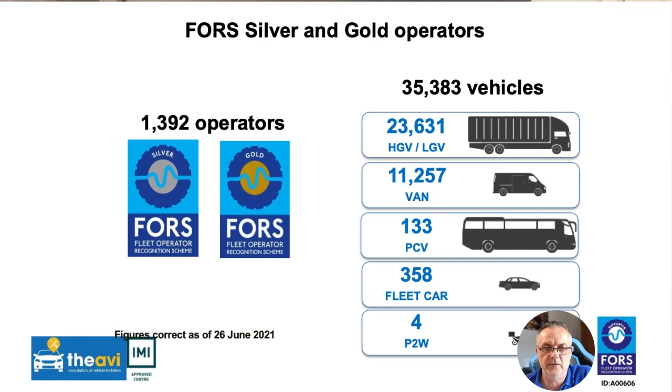And then we move on to DVS. Well, DVS has been launched by the Mayor of London now. It's actually live now, and it's for HGVs. Basically, it's an offence now for any vehicle over 12 tonnes to enter London without a permit. The legislation is based on a star rating, and each vehicle is given a star rating, and the indication is basically how much the driver can naturally see from the cab directly.

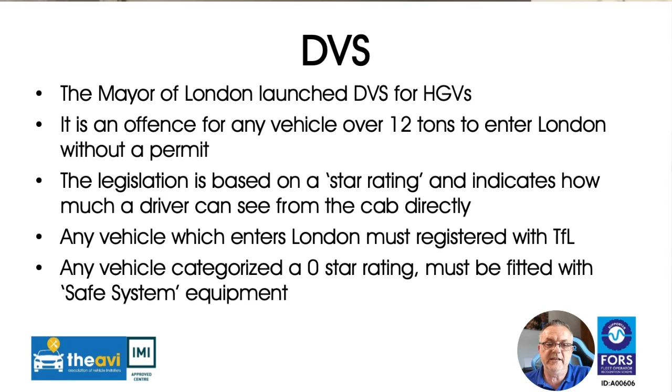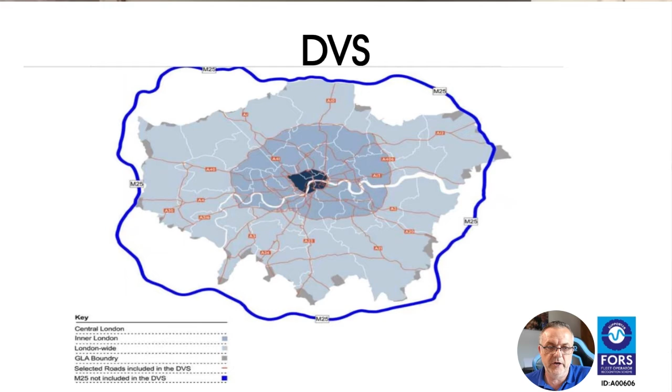Any vehicle which enters London now must be registered with Transport for London, with TfL, and you're given the classification when you register. Anything that's categorised as a 0-star rating now must be fitted with safe system equipment. To give you an idea about the type of area it covers, it's inside the M25 - not actually on the M25, but inside the M25 in what they call, I believe, the London-wide area.

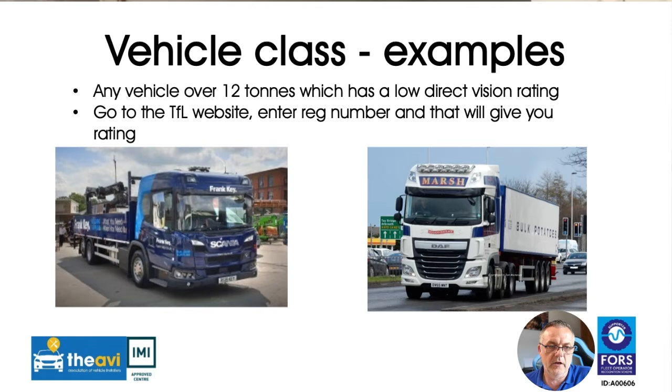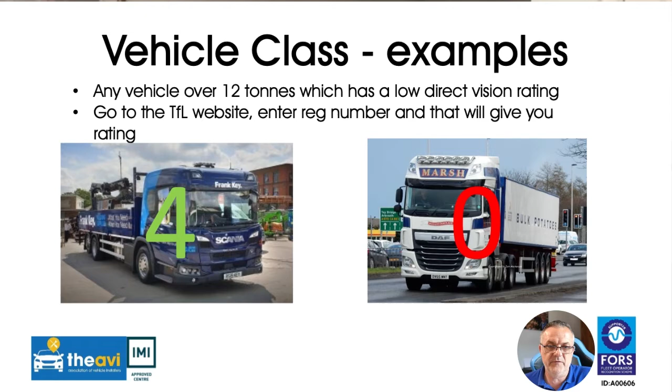And to give you an idea about the vehicle classes, you can see there's a low-entry cab there, and then we've got a high cab there. Basically the lower cab is a class 4, and the quite high cab there you can see is a class 0. So that class 0 vehicle would need a safe system fitted.

So we look at the FORS requirements and DVS safety systems. We'll quickly go over the bronze, and then we can go over the silver afterwards. So bronze is pretty much standard kit on coach-built vehicles, and normally they're fitted by the manufacturer as well - we're talking about class 5.

You can see on that slide there, the class 5 and class 6 close proximity mirrors, and then also under the bronze you've also got a side underbar, so that's your side underrun protection, and then you've also got the blind spot warning signage there just at the rear. Okay, so that's your bronze.

And then for silver, you have to have side sensors fitted - your close proximity sensors and a blind spot camera - and then also you need the audible warning system when the vehicle's turning left. And if it's a rigid vehicle, you need to have a rear view camera for when it's reversing, and also an audible warning system for when the vehicle's reversing as well.

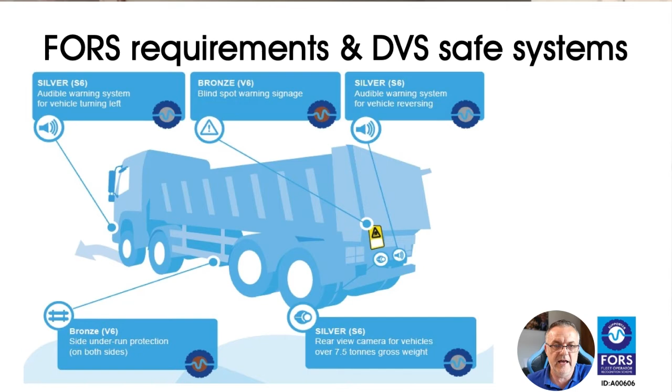So in terms of signage, we'll go right back to the bronze and talk about signage. The signage that you're allowed to put on there, it's a requirement that you have warning only signs, and then it has to go on the rear of the vehicle. You're not allowed to put instructional signs on the back saying stay back, for instance, like you can see there, or anything that's offensive - those are not acceptable.

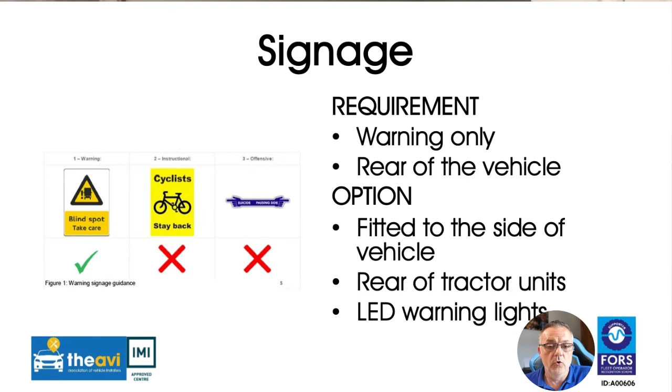And then the option is to have one fitted to the side of the vehicle - you can have one fitted to the side door or along the side of the vehicle. You can have one fitted to the rear of a tractor unit, or as an option, you could have LED warning lights as well.

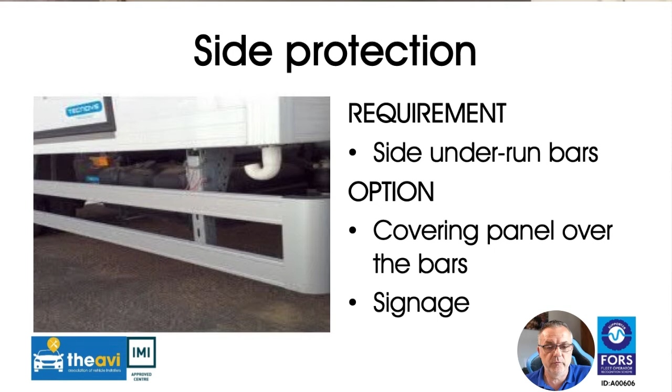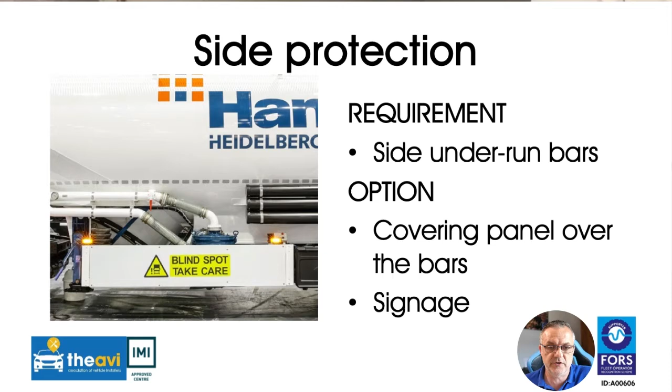In terms of side protection, the requirement is side underrun bars. However, what you could do as an option is to cover the side underrun bar with a panel. And in terms of signage, yes, you can put signage on the side of these underrun bars as well, as an option.

Class 5 and Class 6 mirrors, as we already know, most of them are installed by the vehicle manufacturer or the vehicle bodybuilder. Class 5 is the mirror at the top of the passenger door, pointing downwards. A Class 6 mirror is the one that points from the front of the windscreen and shows the front blind spot on the vehicle.

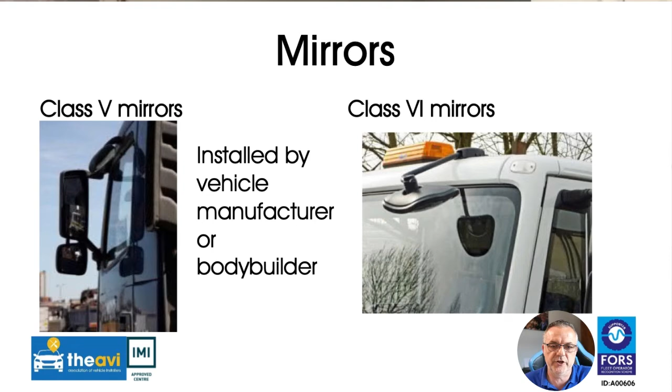So we move on to audible warnings, that it's a requirement. When I talk about requirement and recommended, the recommended is not actually needed, it's only recommended. The parts that are requirements basically have to be fitted. Recommended is an option, or they'd like it, shall we say.

So requirement is near side of the vehicle, activate on the left indicator. Recommended is a voice message to tell you that the vehicle is turning left. And also it's recommended that a cut-off switch be fitted so that the driver can switch it off between 11:30 at night and 7 AM in the morning.

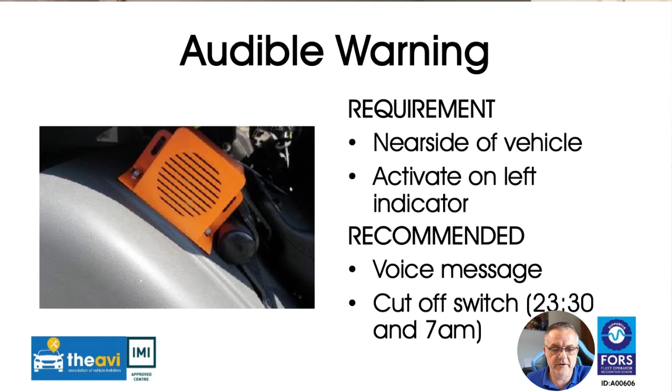For FORS only, the requirement is on the rear of the vehicle and it activates on reverse. So the audible warning is only on the rear of the vehicle, and it activates on reverse. It's recommended that it's a buzzer, bleeper, or voice message. And again, a cut-off switch, or you could use the same switch to cut it off between 11:30 at night and 7 AM in the morning.

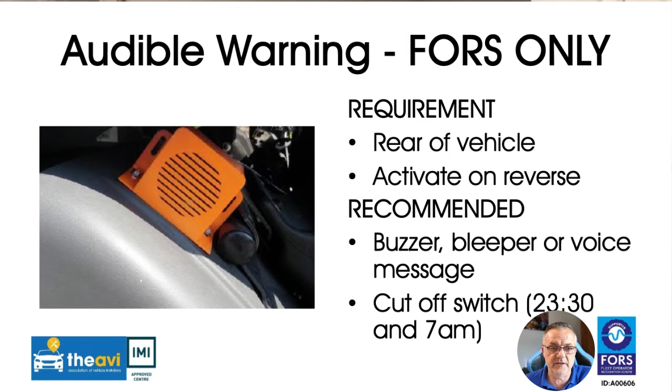And we move on to blind spot vision - this is like the camera. Your camera has to be fitted on the near side. It's a requirement that it needs to be a 7-inch display, and the display has to be switchable as well. So it'd be better if it switched to reverse, and then also switched to the left-hand indicator if it was a rigid.

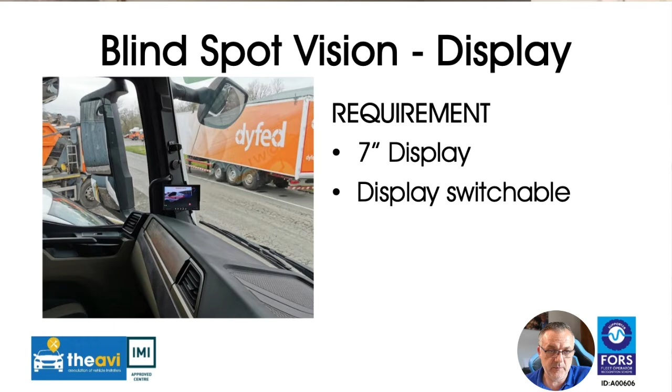There's another example of where a display could be fitted as well. So in terms of blind spot vision with a camera, it's a requirement on the rear if it's a rigid - this is for FORS only, not for DVS. It's a switchable display, and the recommendation is that it covers all the other areas of the vehicle, so that's what's left, which is the offside and the front view. Also, it should have the recording system fitted, and that's for training and development.

However, there is a little marker here for HS2, and that is that HS2 requires, on any vehicle that goes onto their site, that a 4-camera system be fitted and a DVR system fitted also.

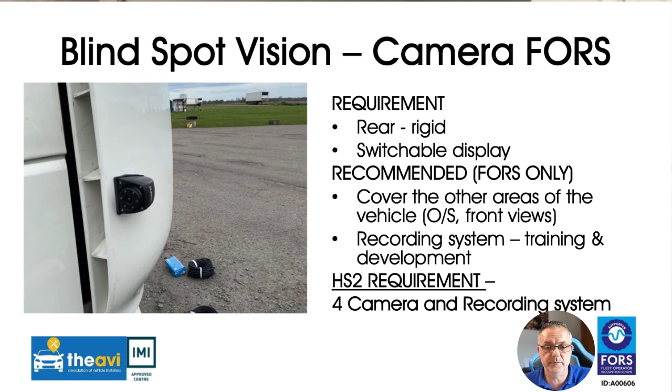So we move on to these blind spot vision sensors, and I know that this is a bone of contention and has been all the way along. The requirement is that side sensors need to be fitted to the vehicle. This is only recommended to go 6 meters along or 1 meter from the rear, whichever is smaller. And then an optional item...

...is for FORS, that rear sensors are fitted on the trailers and the rigids. Side sensors are not required on any trailers fitted to rigids, or trailers like where you have a tractor unit and trailer. There's no side sensors required for those.

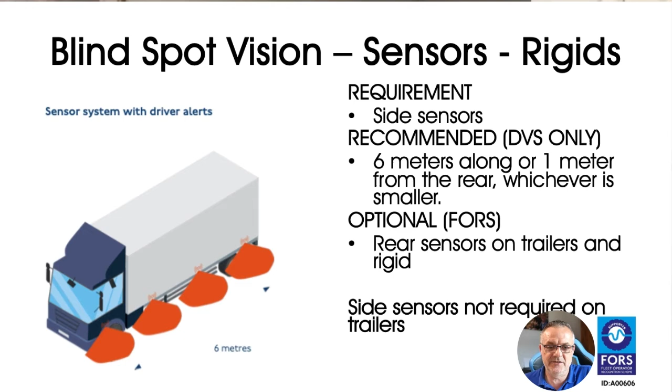But when we talk about tractor units, again, another area of contention, I believe - side sensors must be fitted, but it's recommended to avoid 1 meter from the rear of the vehicle, to avoid the articulation area. So basically, anywhere below the trailer, because obviously when the vehicle goes off to the left, you end up setting off the sensors, and so we end up with a situation where you have false alarms on the vehicle. The sensors are there to pick up the vulnerable road user.

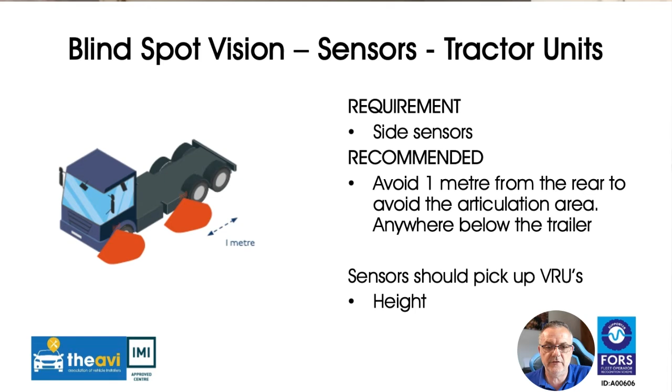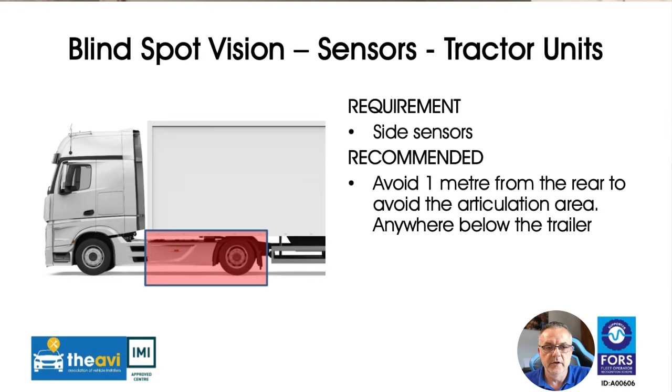So there is a little marker here that I've been pointed out to, which is height - make sure you've got the right height on the sensors. As I say, try to avoid, even with those long-reaching trailers, 1 meter from the rear of the vehicle, to avoid this articulation area, because as the vehicle turns left, you end up with false alarms on the device.

So, that's it, written there again. Oh well. So, common issues.

These have been picked up as issues we've been made aware of out in the field, and this is going to be a massive issue moving forward because it's only going to start to create problems. I think this will probably start in the winter when we get salt, when the grit goes on the roads and they start to get wet, and you end up with a lot of salt, which causes lots of corrosion, as we're probably already aware. But this is going to be a massive thing.

Camera corrosion, definitely, and it's a very simple fix. It's so simple, you would not believe how easy it is to fix, and it's more of a preventative thing rather than a fix, that you can do.

That is basically to apply some electrical compound. I know we've got DC4 in the picture, but other manufacturers make this stuff as well, other manufacturers are available. I think the correct wording is that's what you need - you need to apply some electrical compound or some non-setting silicone compound, and then basically seal it with either adhesive lined heat shrink or amalgamating tape.

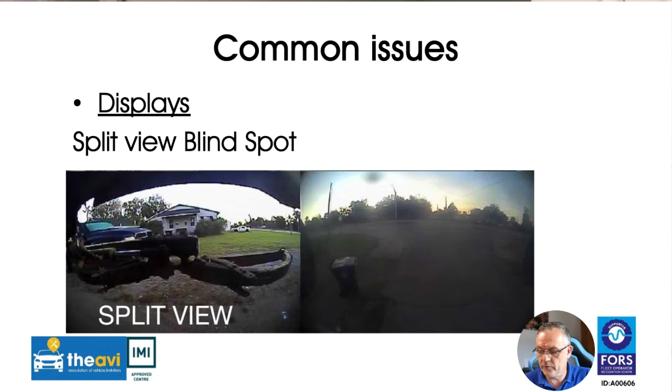However, there are things that we can do. What should be seen is something like this, where you have a split view - a rear view and a side view camera view - rather than seeing that while they're driving along the road. I think it's really distracting.

Or even have it so it's a switch view. These are the sorts of things we're talking about in terms of recommendations. So you have a switch view which shows turning left, or when it's reversing, and then a split view blind spot while the vehicle's driving down the road.

A lot of people will say, well, how is the driver going to check to see if all the cameras are working? Well, that's fine - all the system needs to do is switch on for the first 30 seconds and show all the cameras, so the driver can get in, have a look at the screen, check to see if it's okay, and then carry on. Then it goes back to either a split view, or the screen just goes off and doesn't come back on until the indicator or the reverse is switched on. So these are the sort of best practices, I would say.

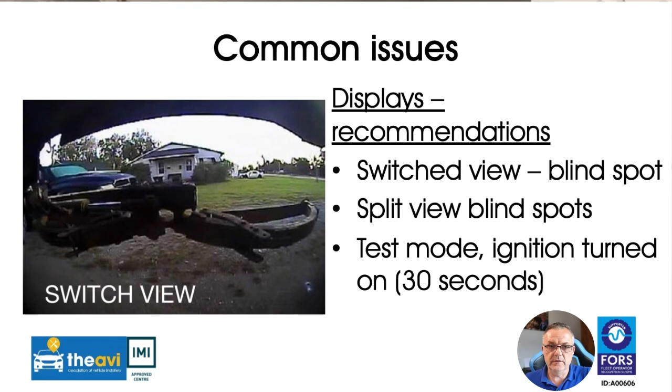Other issues we've seen out and about are basically where the camera mounting is not covering the blind spot. I've tried to illustrate that - it comes from regulation 46 of the UNECE, and it basically covers what a class 5 mirror should see. If you look back into the DVS regulations, it actually says that's what we should be covering - the class 5 mirror. Now the class 5 mirror would then show the bottom step, so that's where we need to be aiming for.

That's definitely something I think that needs to be addressed - that we make it very clear now that it should be showing that lower step, so the driver's really got a good view of his blind spot. Otherwise, he's just got a view of the rear view mirror.

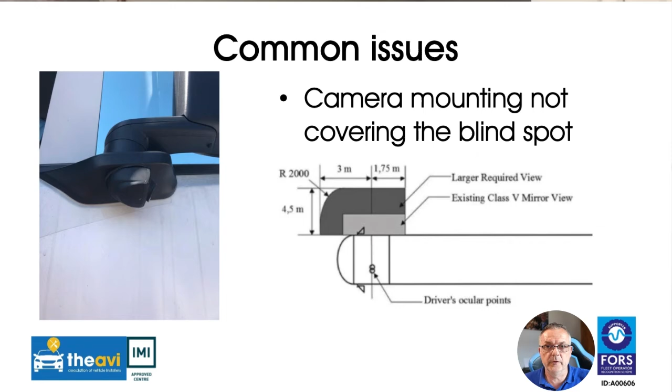So I've looked at this and I've given some best practices - optimum height about 1.5 meters, that gives you the best view. I know we're talking about this, but I've got a camera in front of me, I'm looking at the camera - you've all got cameras on your phones, and the best way to explain it is perspective. Look it up, it means the view, your perspective. I think that's really important when a user, or when you're talking this round with the driver or the transport operator, about the perspective, about what they're going to see as part of the view.

Things that do crop up: if you put the camera near an indicator lamp, then when the guy's turning left or right, you get this massive flash that completely wipes out the camera for that momentary second. It might be the momentary second that you need to see something.

So there's lots of things to think about, not just where the driver wants it. At the end of the day, this is a safety system, so the thing you should put first is safety before image or appearance.

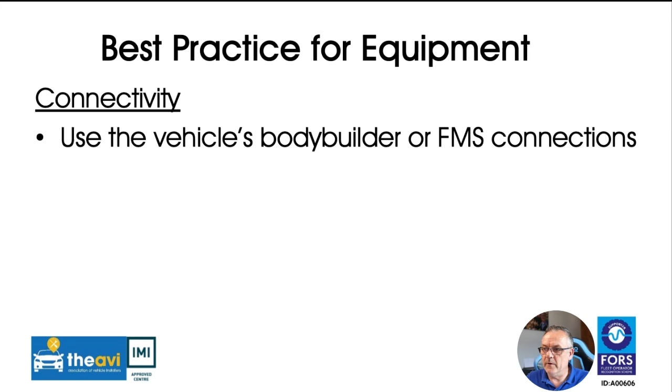Oh, here's an interesting one: can you confirm if the reverse bits are standard for DVS? The reverse parts are not standard for DVS, it's only for FORS as it stands. So yeah, it's only for FORS, I'm afraid, not for DVS.

Any other questions? Danny's on. Hello Danny, Mr. Oughton's on as well. Welcome, Mr. Oughton.

Yeah, I can see, George, I'm still sharing my PowerPoint. I'm not sure what's happened there, I think the screen's frozen on LinkedIn, unfortunately. So sorry about that, folks.

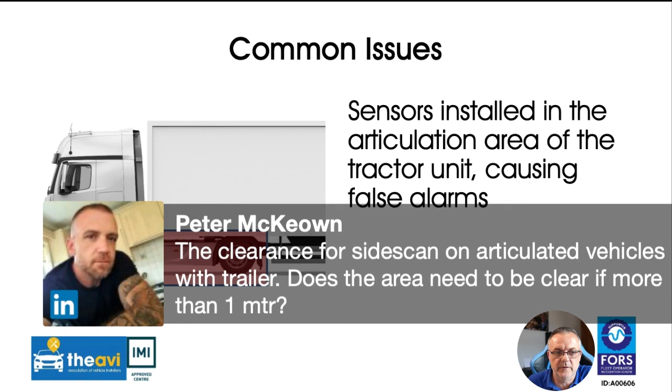Yeah, I actually showed you a slide, let's go back to that slide because that was the reason why I showed that view - there's no way you can see on this one. I'll just drop your question off. You can see on this one that it's quite, and there's lots of those trucks out there where the fifth wheel is set so far back and the peg is set so far back as well that the cab actually almost meets the back of the trailer. Now in this sort of circumstance, I'd say it's just a pointless exercise trying to put any sensors there. And that's why they recommend - it's only a recommendation - that you put sensors all the way to the back of the vehicle anyway. The main area we need to concern ourselves about, and make sure it's done right, is anywhere at the front, anywhere in the cab area. So anywhere between the front of the cab and the rear of the cab is really an area we need to concentrate on. And if it's a day cab, like a small cab, then just a little bit further back. Because at the end of the day, we don't want false alarms, we don't want the drivers getting all annoyed.

It's there, at the end of the day, to assist the driver, not to wind him up. And personally, I think that - and I say it's only a personal view - also bear in mind, chaps, that it's only a recommendation that it goes so far down the cab. All we need to do is fit side sensors, but I will stress this: fit side sensors properly. That's the key thing - right height, pick up, check that it's actually picking up pedestrians, cyclists, bikes, and horse riders.

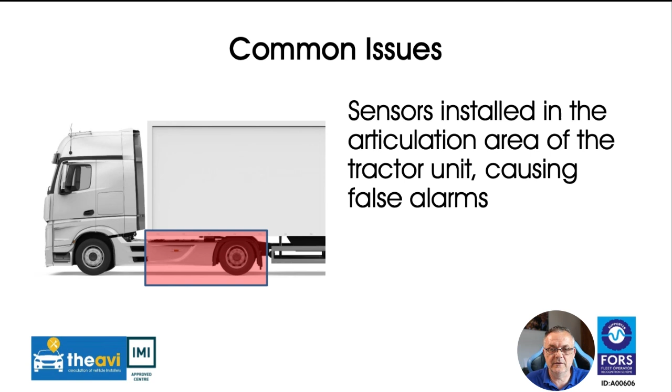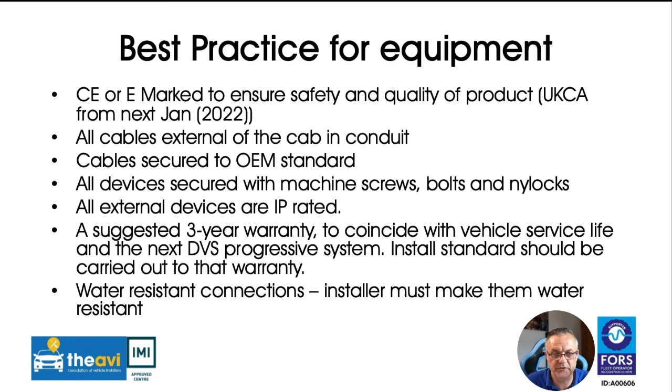Next week we're going to talk about soldering. I've got some interesting things to tell you about soldering, because I know a lot of you use these electric soldering irons, and I'm hoping to have a bit of a coup next week about these electric soldering irons. So yeah, I know they blow up, but there is another thing that does cause an issue with the electric soldering irons.